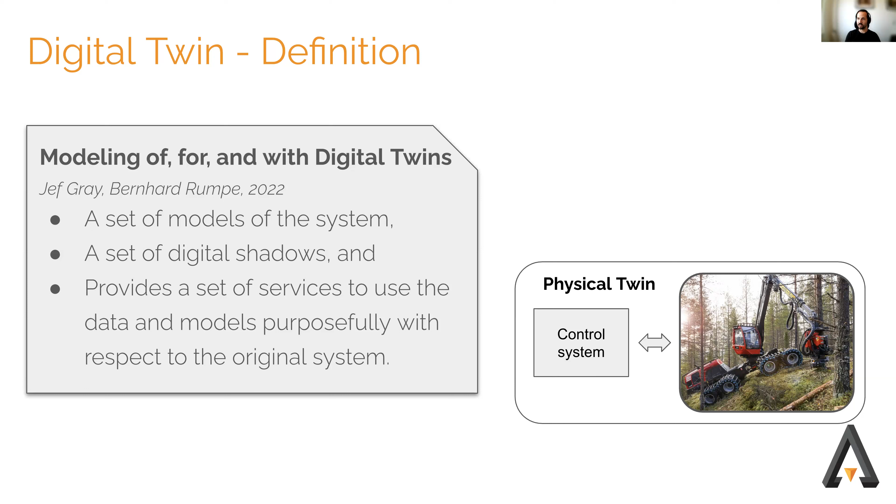And that's kind of the theoretical model, right? So the set of models of the system is the physical twin in the terminology that we like here. And the digital twin is the digital shadow then. Both these systems typically have hardware parts and software parts. These images show how the setup usually looks in our work. There is some kind of hardware, like a heavy machine, could be other things, but it's representative of what we work with. And the hardware has software, and both the physical and the digital twin have those systems, and then they interact.

There's data going from the physical twin, and there's control going back from the digital twin to the physical twin. This is also from theoretical stuff we've been looking at, and if we don't have all these four parts, the two twins and data and control, then it's kind of, well, parts of a digital twin. But this is generally one test we use to see, are we using this kind of workflow? It's a workflow we sell to our customers, so it's useful to have a definition.

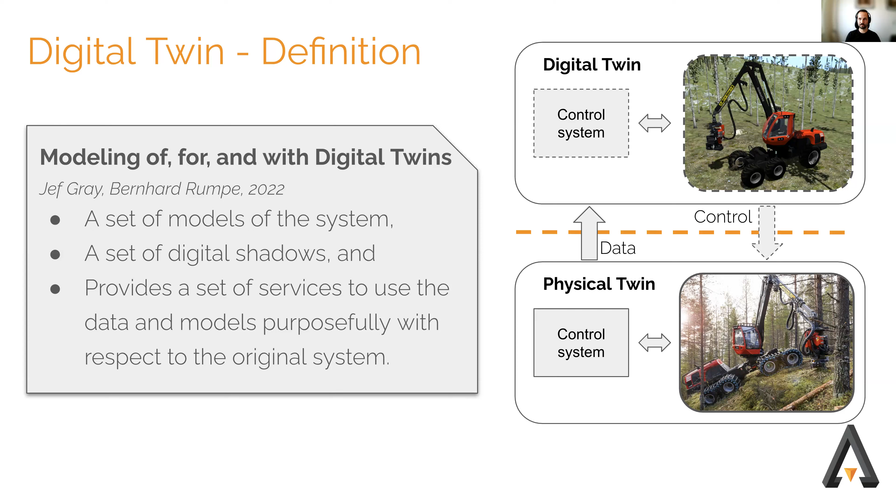And on the next slide, I'll just say some words on kinematics versus dynamics. Because it's, thank you, Fredrik. It's useful to look at just the right amount of stuff, right? Kinematics is a traditional way of controlling robots. You have angles and positions of the different parts of the robot. A really stiff system, typically. An industrial robot doing welding in a car factory perhaps is very stiff, and the path planning can be parameterized, since the position of the end effector can be known from angles and position. Scenarios are well defined. You can use inverse kinematics to know where the robot is going.

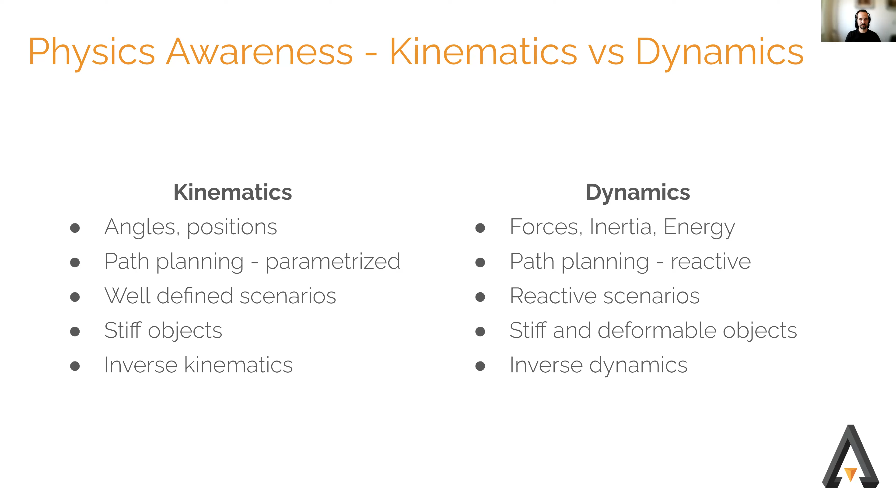And with dynamics, next click, Fredrik, we have the forces, the inertia, and the energy known apart from the angles and positions. The path planning can be reactive. For instance, if some heavy load is placed on the robot, you can calculate and work with the energy related to that. Reactive scenarios, reactive to collisions mainly, that's one of the big ones. We can also work with deformable objects and inverse dynamics, which is a topic I'd like to have said more about, but this isn't for this talk. So this is a distinction we often use.

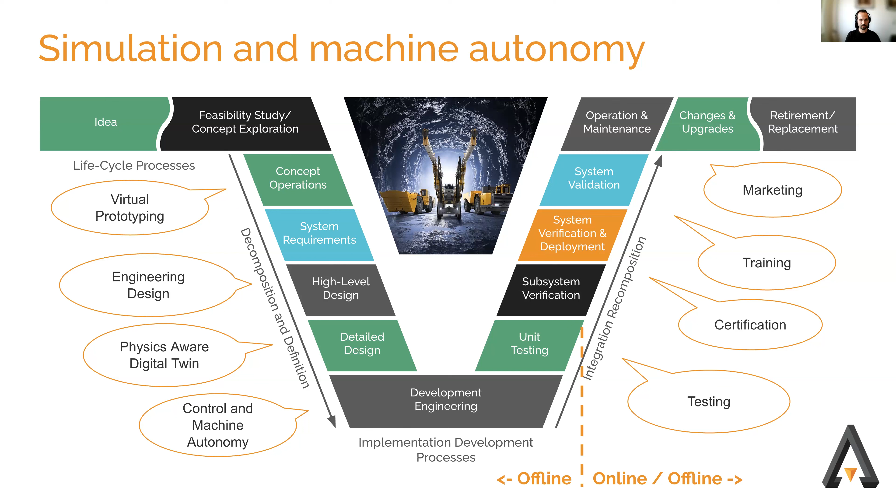And if you look at the next click, we can see we've made a small arrow there. Digital twins can be offline and online, right? There can be a simulation of the digital system that happens in discrete time, not real time. So you make a simulation at the concept level, and then you test things out, and then you go back and test on the physical, and you go back and forth between the digital. But it doesn't have to be in real time. But when you go to a digital twin modeling something that's happening right now, it's an online simulation. Yes, next slide.

Sensors and perception need to be simulated, dynamic scenarios, simulation services. Maybe you don't want to run everything on one computer. There needs to be expertise and feedback through control and ML training, test and certifications, monitoring and logging. These are all parts of digital twin as a solution. And once again, classically, simulations can be just a small part of this. So in order to tie everything together, we've been trying to define a modeling language that can follow the digital twin along between these, this is kind of opening up from just the machine simulation.

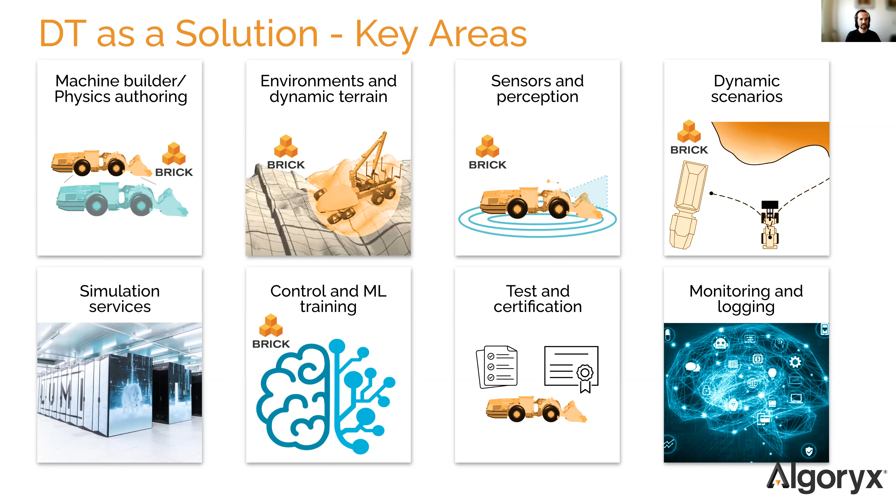Yes, so next slide. Okay, I'll take over then.

So I will start then by explaining our main product, which I have to mention requires a commercial license. So our main product is a physics engine. So we are really fast and stable and robust and accurate. And we are working in the non-smooth domain. So we handle impacts in real time, and we can handle dry friction as well.

And our product is based on the SPOOK method, which is presented in Ghosts and Machines, which is written by Claude Lacoursière, who is one of our founders. And just to mention, we can guarantee stability by setting a damping time, which will then make our equations to be satisfied, and we get good matrices to solve.

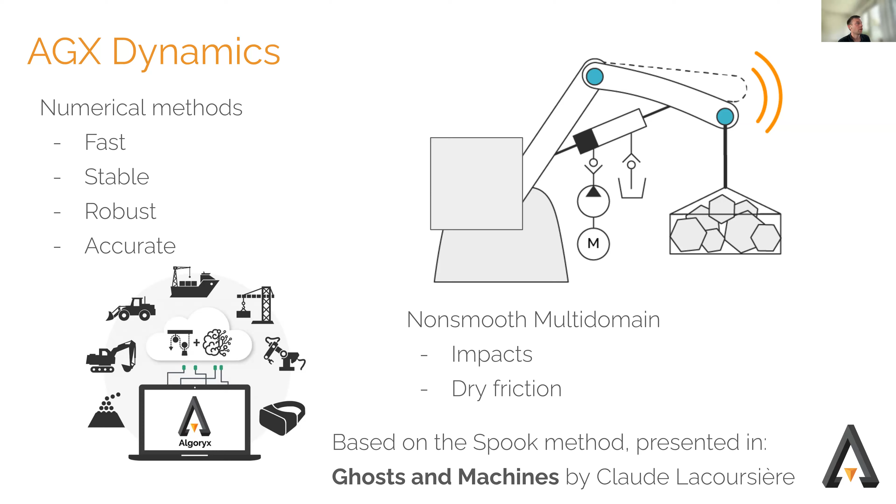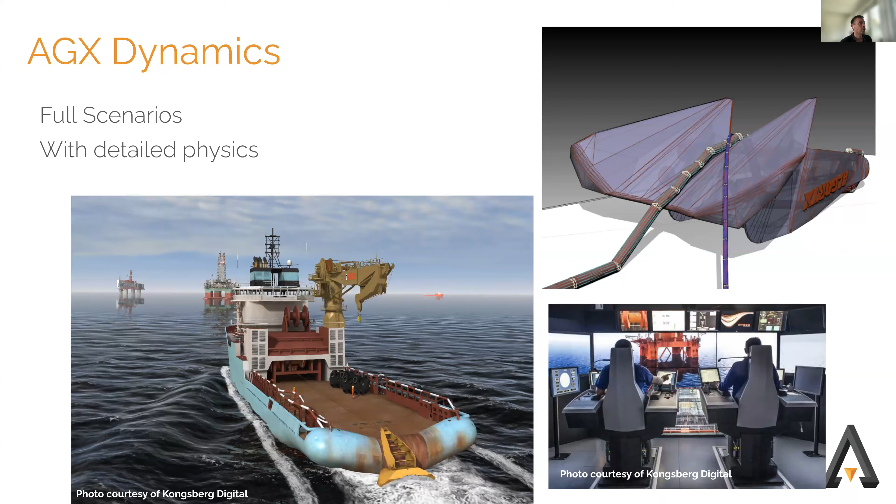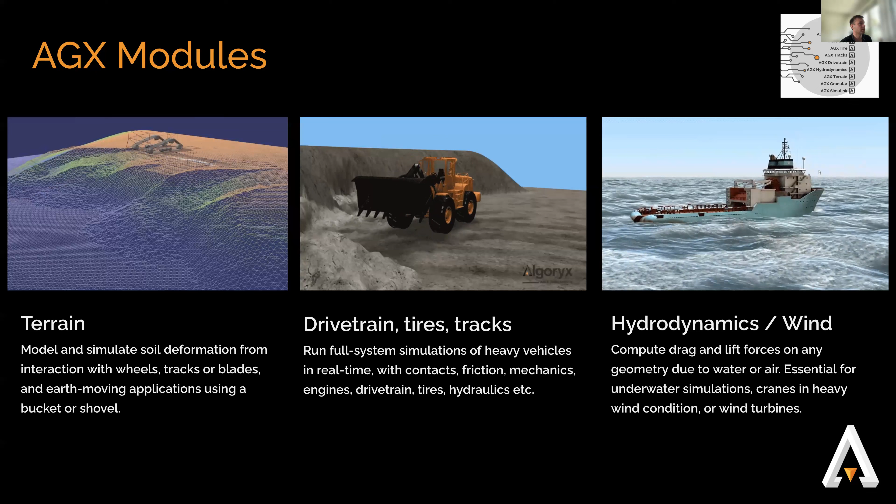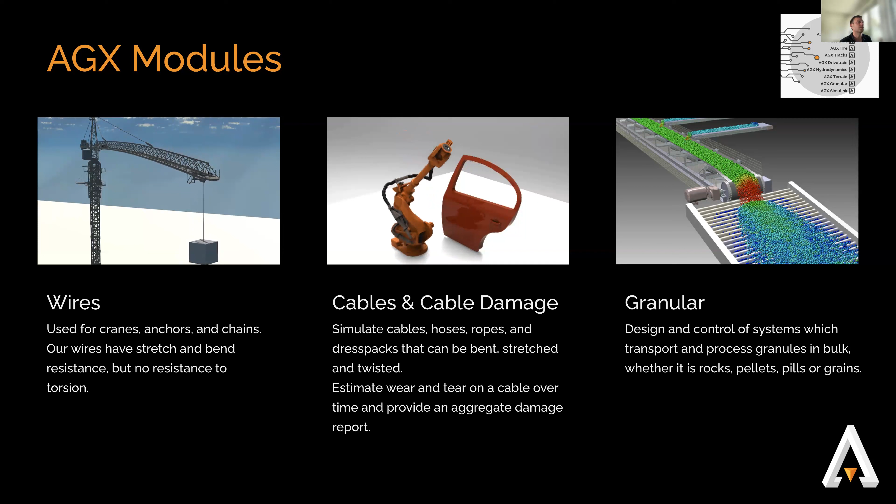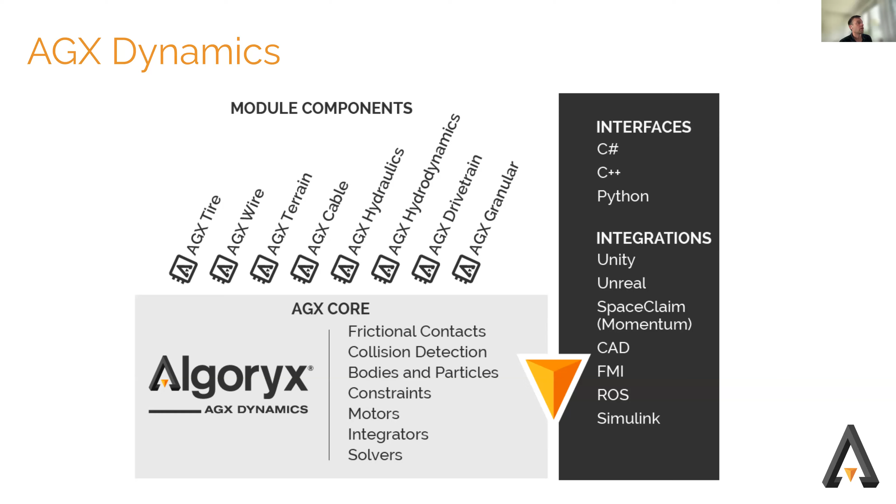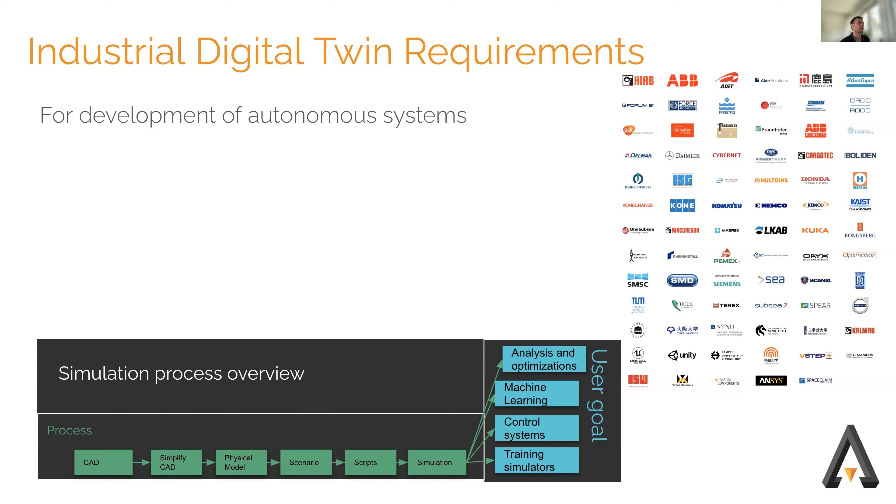And these modules are accessible today through coding interfaces, mainly used in C#, C++, and Python. We also have integrations in Unity and Unreal. However, to the right now, you see a list of our customers, and they integrate this into their system. They adopt our product and integrate it, and they have a lot of requirements that they usually have to do on their side. So usually they do something autonomous. They have a control system in the loop in their real product, and they want a digital twin that they either want to use for machine learning or developing their control systems or doing training simulators.

And so control system integration, they always need to do. They want real world equivalent performance. So for example, these wires need to have accurate tension measurements. They usually have CAD representations of their products. They want the CAD more or less automatically reflected into simulation, which is not usually a thing.

So the green squares in this figure show that they start from CAD, then they have to do this long process to simplify the CAD. They will need to add some physical properties to this model. They have to model a scenario somehow, maybe in code, maybe somewhere else. They need to add a lot of logic in scripts, and then they can put this into the simulation to do what they want.

They also want this in variable configuration. So the CAD might be in one configuration, but they want a different setting somewhere or a slightly different product to simulate. And then there's a lot of work to redo this from the beginning. So this is something we've been working on, how to make this more general.

So they also need a single source of truth for the simulation model, so that it's not like, oh, did you remember which file we did this part of the thing in, and then they email the simulation models to each other, which has happened, and that's something they want to avoid, but it happens. So we try to solve these problems for them.

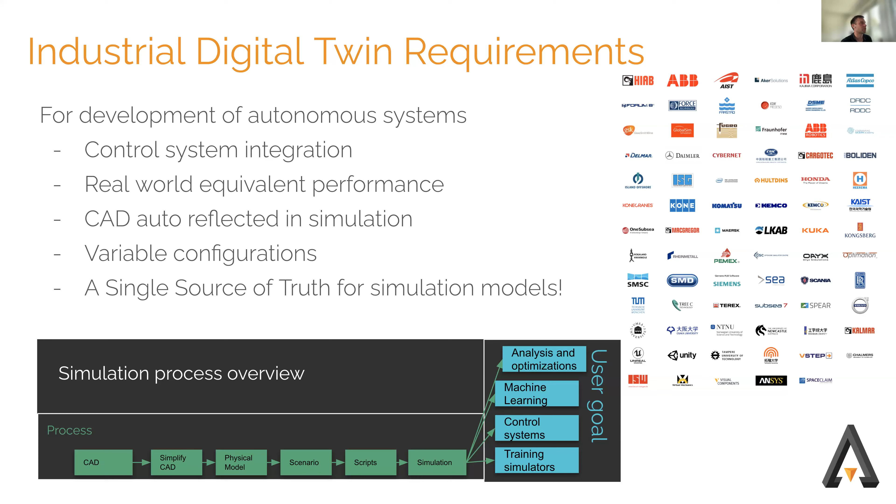So we need somewhere to define this physics-aware digital twin, but where should we define it? And some of our users make their own formats and so on. And we've seen this throughout the years, and we want to come with something that solves a lot of their problems. We have tried to use some XML-based formats, like URDF, the Unified Robot Description Format, but it's not enough to meet all simulation models. I mean, a wire is not described there. There are a lot of things that don't fit in these formats.

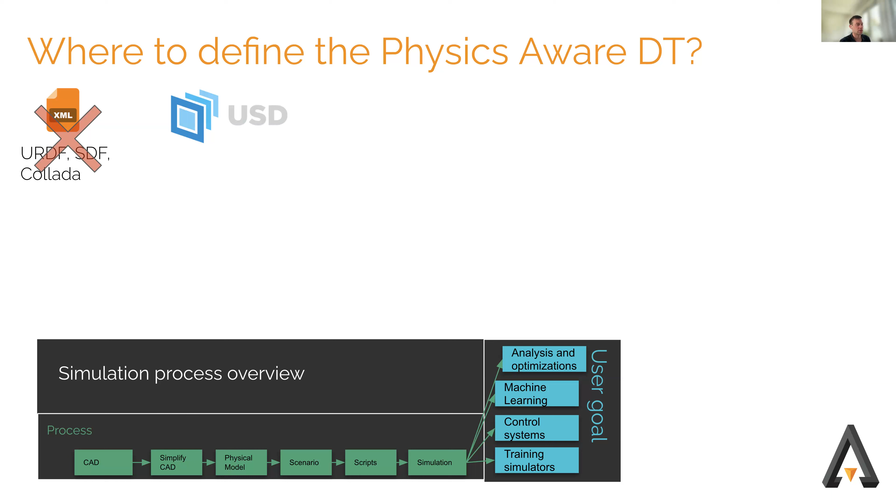Then we have been looking into the Universal Scene Description format developed by Pixar, which has bindings to C++ code, and it has a layer system where you can really have these definitions on top of definitions, but it's mainly used for graphics. The physics layer is not mature enough, and there's, according to me, one thing missing with expressions, where we need variables in these mathematical expressions to describe our models. So that wasn't good enough for us either.

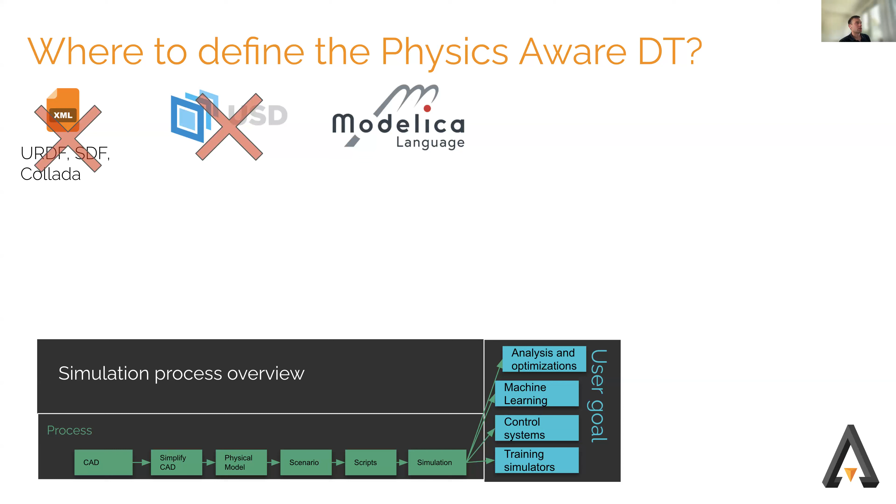But we looked into Modelica, and Modelica gives us these expressions, but we couldn't find a good fit for these real-time simulations with bindings to control systems and so on. So we had to develop something ourselves, and this has been ongoing for a couple of years.

So Brick is, to be clear, an open modeling language. Then we use Brick to define the Brick physics format. So Brick could be used for other things than physics, of course, but later on I will show you how we use Brick and describe the physics format and its features. And using this format, we can then bind it to our API in the physics, AGX Dynamics, and then we have the AGX Brick runtime.

So then I would say that Brick would address these parts of the customer simulation process, where they would maybe get values from CAD and describe the physical properties of the models and describe scenarios, and they could eliminate a lot of logic that could then be living in the digital twin representation in Brick. And then AGX Brick runtime would load this model, and they can immediately do their work.

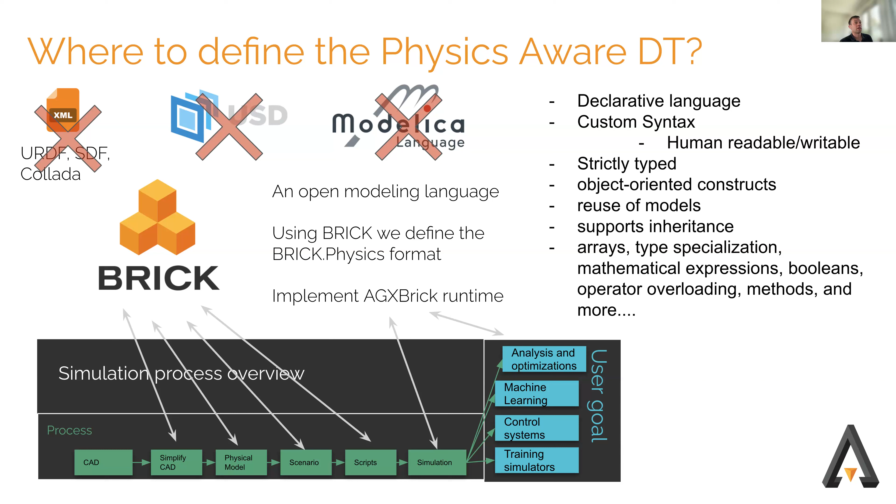So just quickly, Brick, I would say, is a declarative language. It has a custom syntax which is human readable and writable, strictly typed, it uses object-oriented constructs, and you can reuse models. It supports inheritance. You have type specialization and these mathematical expressions and much more. And we'll go through a couple of features here.

And then we want to be able to load this to the APIs of different tools. So it shouldn't be bound to our product, of course. So we could load it with Bullet or PhysX or some other physics engine. That's one of the main purposes.

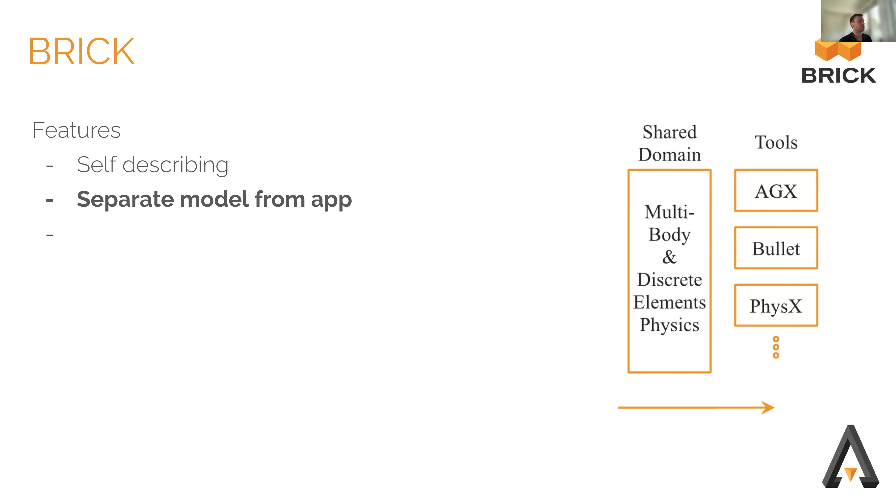But everybody does not want to model their product with multi-body, very general things. They want a domain-specific language. So Brick is built so that you can build domain-specific ontology and formats on top of other formats. So we would call it a bundle. So it could be a Brick robot bundle that depends on the multi-body bundle. And in this way, we can bridge domains. So we can have a robot-specific ontology and a vehicle-specific ontology.

And then with Brick, maybe we put a crane on a truck. And both are described with their specific domain-specific bundles, but then in the shared domain they can meet and then be executed in the tool. So there's one more level to this.

So there are a lot of external resources that we would say are a better fit for specific model descriptions. So URDF, there are a lot of robots defined in URDF. So we had to make a way for such formats to be referenced by Brick instead of you having to copy the data. And that's an important thing as well. I'll get back to that later.

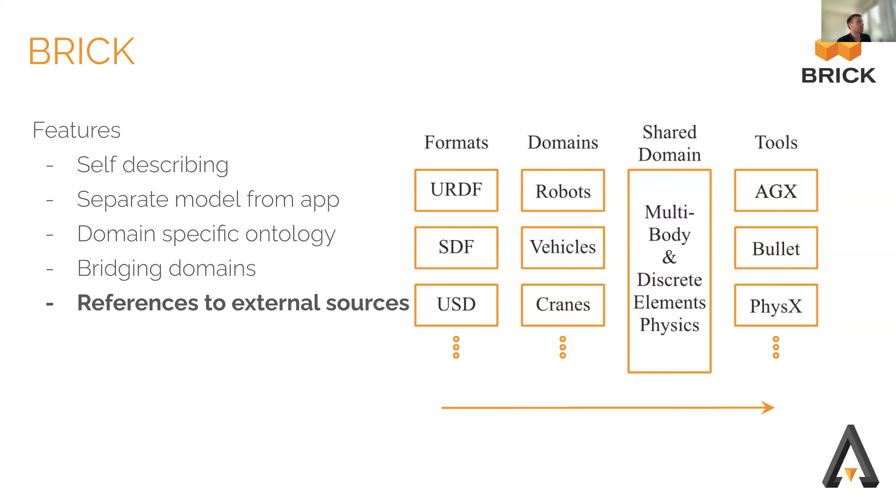So, yeah. Okay, I didn't see. All right.

So now I'm going to try to explain how you use Brick to model by composition and try to show how it's extendable and reusable by a simple example, as simple as I could make it. So these Brick bundles, say that I'm using the Physics3D Brick bundle, which has the representation of a rigid body. So it knows what the rigid body is in the multi-body domain.

Then I want to declare a wheel. And then I say that the wheel has a radius attribute and a width attribute. And the wheel should also have a collision geometry. And then I add the collision geometry attribute, which then gets a type of a cylinder, which the Physics3D bundle knows about. And then I map these values from the wheel radius into the collision geometry. And the cylinder already has the notion of the radius and height.

But then for the wheel, I call it width instead. I don't know if it makes sense. All right, so this is a wheel. And I can't instantiate this. It has two parameters that are not defined. But then I use Brick to say, now I want to define a simple wheel. And then I define these variables, and it's very compact and easy. And now this is instantiable.

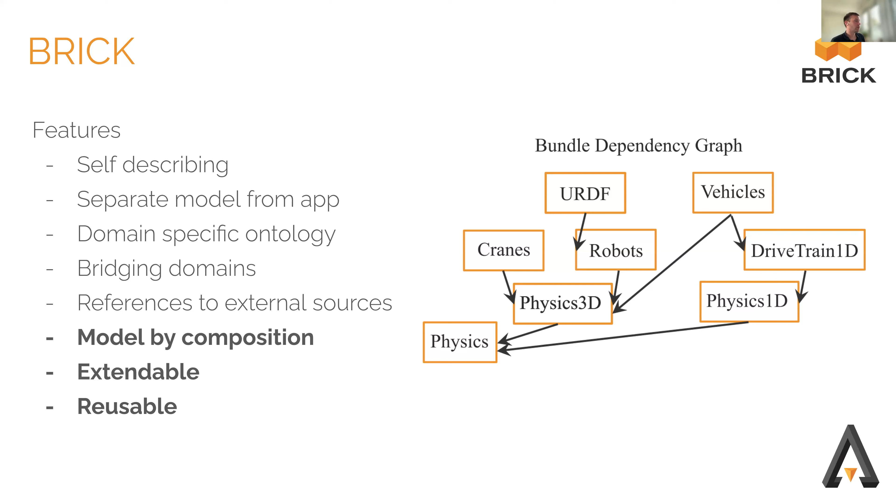We don't need 3D physics, but then we can have this dependency so that we utilize the ontology of both worlds, and we can model in the domain-specific with the domain-specific ontology, and we can give the user something that they recognize, but still everything propagates down to the multi-body shared domain, and then we can execute the simulation.

Quickly about the Brick infrastructure here. So we have C++ runtime bindings, I told you. And we have to go from text representation to a C++ runtime. And this is a quick view over the parser and how we do semantic analysis, and then how some bundles have C++ code that has to be executed on load, and some parts don't need that. You can build logic into your models. And this also enables the evaluation of expressions, so that a variable could depend on several variables, and then you have the mathematical evaluation of equations.

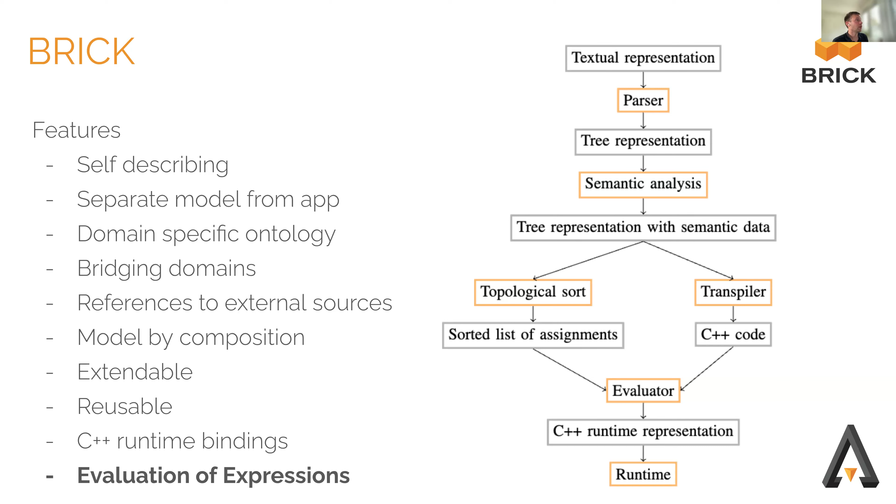All right. So this solution, Brick plus AGX, gives us a great feature list, in my opinion. And here's a video. It's an old video, but it shows you how the CAD has been imported, and then we can assemble this with the Brick definition. Imagine that every part is assembled by a constraint, and this constraint has variables, and these variables could have variable initial conditions. So you can configure this in any configuration that is available in reality. And then you can parallelize this and do simulations of your machine in various different initial configurations, for example.

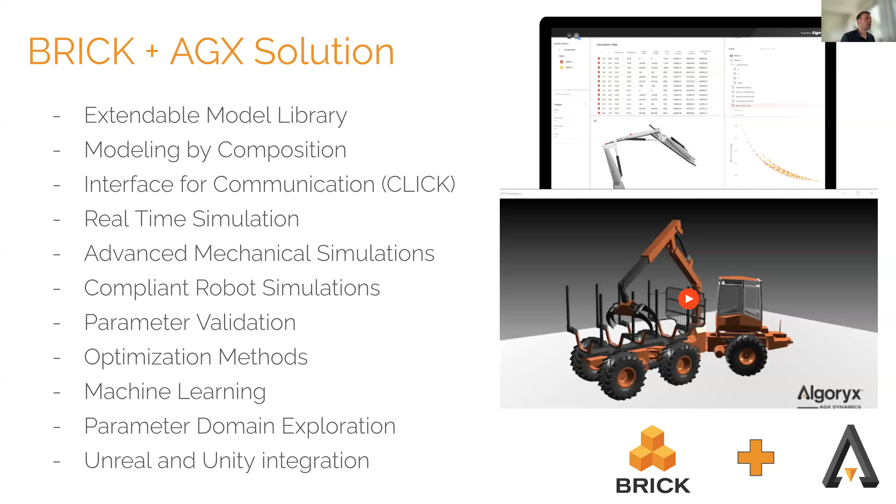And this is what we did in one project where we developed an online web application for engineering design of loader cranes, where we could, for example, change some values and then the crane just built itself and we could measure capacity of the crane with its full working region.

Other projects where we've been using Brick. Now this is actually the Brick language you just saw. That's something that's quite new. We were using YAML, just a subset of YAML, and it did make a lot of sense, but still there were some issues, and we decided to define this language ourselves. So the code you see now is the old Brick, and the new Brick would actually do the same thing in less than half the number of rows.

So that's good. And this is the AITOC project where we had a Delta robot which has loops in the system. And I just show you how I can take one value which then propagates through the system and then initializes the model in a different initial state.

And then you can simulate it as well. So there's some friction in this thing. So this, I think, visualizes pretty well how physics-aware a Brick twin can be, with the mechanics assembled and useful.

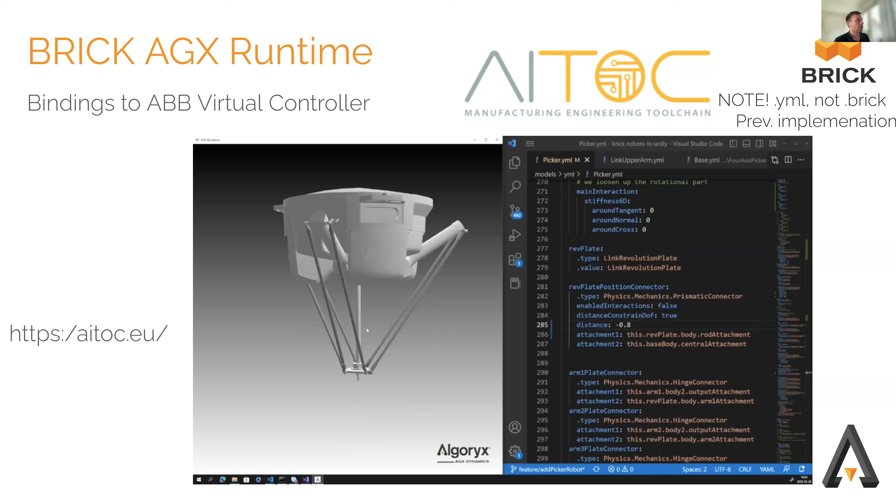Let's move on. You mentioned before that I was involved in the IAM project, and here we are also using the Brick AGX runtime. In this project, we are trying to make robots toss, grab, and box objects, and then we need this in simulation. So here we have the Panda robot, which is a URDF file, which we take into Brick,

and then we augment this. So the suction cup here on the suction gripper is not deformable, it's just a part of the URDF file, but then we can augment this and make it flexible. And then we add a vacuum system, and then we can have this simulation experience.

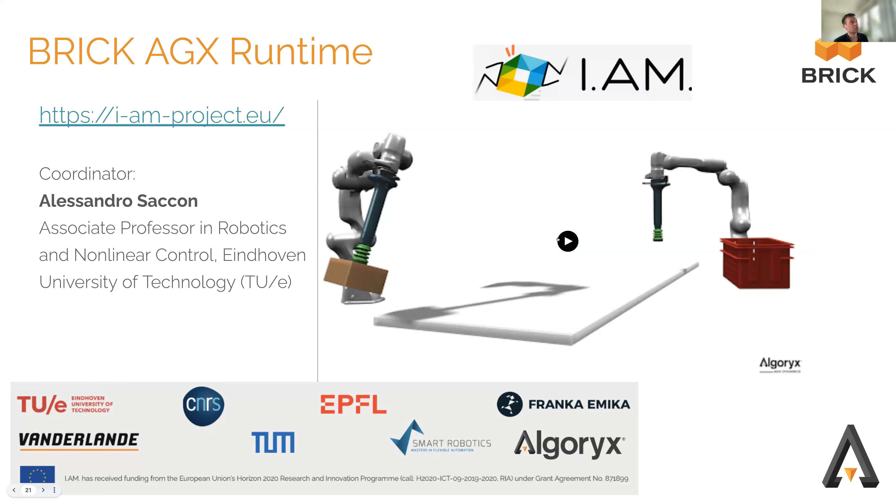And there are a lot of PhDs and postdocs and master's thesis students that work with this framework we're developing in IAM, which is using Brick, and it's also using something we call Click, which is an integration with control systems. And this is just one other work, a thesis project by Stefan van der Palen, who's in Eindhoven, and he's doing two things with his digital twin, I would say.

He's doing verification of sensor signals with physics. So he has a visual sensor that does 3D estimation of where the boxes are. But then to verify this, he could initialize these sensor representations in simulation, and then he can verify in that simulation if it's accurate or not. And maybe the boxes will fall and he will require a new sensor

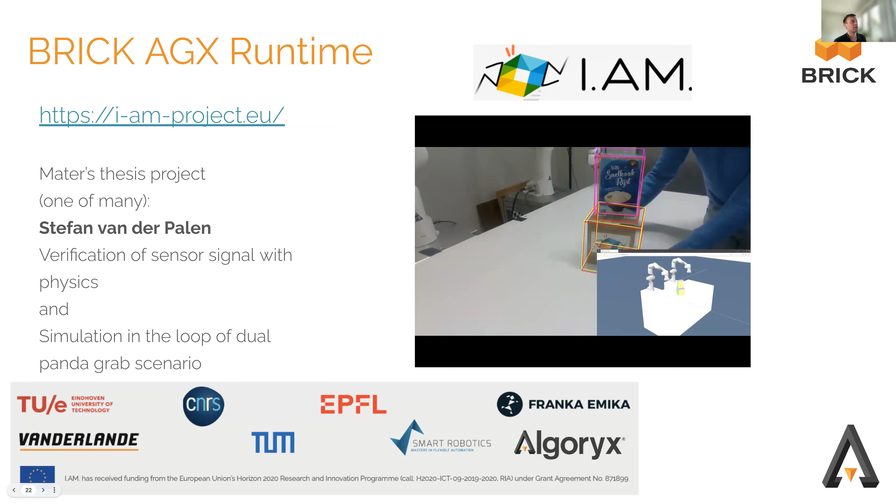request. And also he can use the simulation in the control system and test before the control system is acting on the real system. So that's a work in progress, and that's one of many projects, but I will not go through them all.

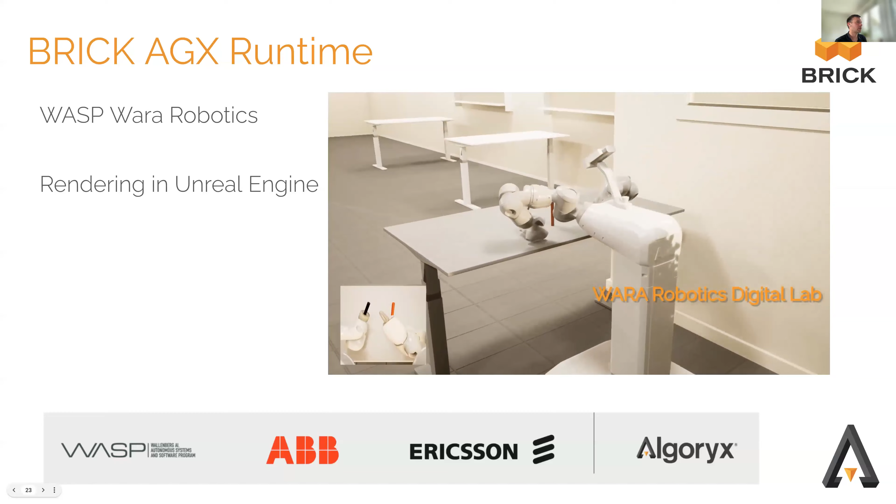Another place where we are using the Brick runtime is together with Unreal Engine, where we integrate the Brick AGX runtime and visualize it in Unreal Engine. So then we have this result, and this is more or less the same thing, but we have nicer graphics.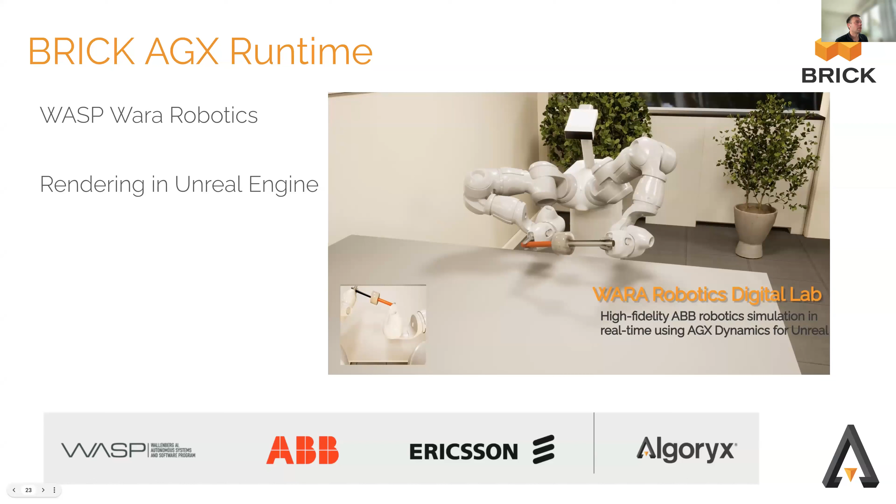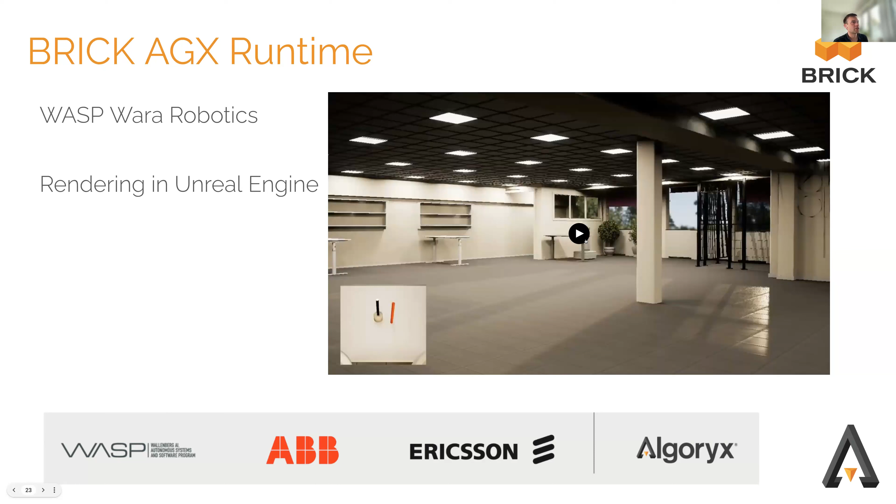All right, so now I think I have shown you a lot of things that we can do, and how we have imagined that all our users in the future, and hopefully even more widely than just our users, can represent physics models with Brick. All right, so let's move on. Now I move back to Joakim.

Thank you, Fredrik. Thank you for that very in-depth walkthrough of what lies behind our physics and how we define it technically. I've been working on more practical stuff, using those systems, using AGX Dynamics, and using Brick in order to do research and client projects.

I've ended up doing mining industry things. Epiroc is one of our larger customers. And here I'm going to present a case study about digital twin simulation. This project is called Safe Remote Drilling Through Predictive Modeling of Hydraulic Hoses. We usually go with Hose Protect because it's about protecting the hoses on a drill rig, such as the one

on the left. On the right, you can see a boom simulated with some of the hydraulic hoses normally present on the telescopic actuated booms on the Boomer drill rig. The Epiroc Boomer is a complex machine interacting with itself and the environment. The question in this project is, how does the control system predict collisions with deformable hoses? Or rather, how should it detect and predict them?

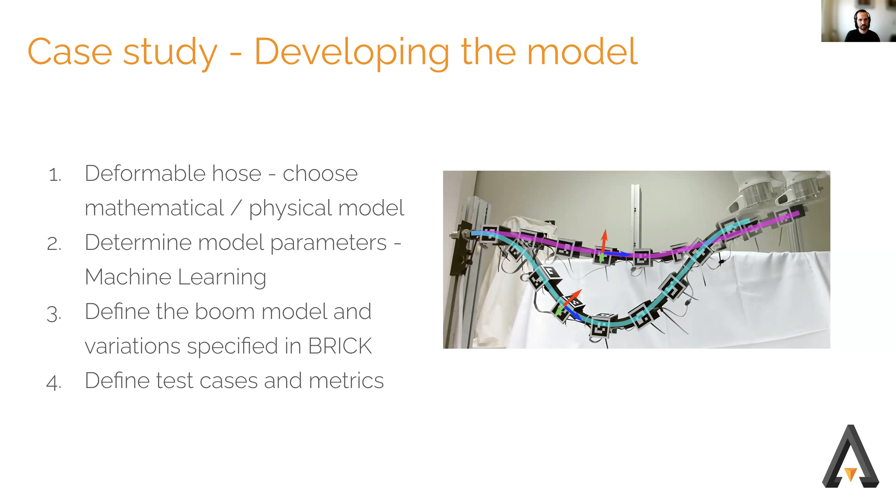Finally, to complete the project, test cases and metrics have to be defined in order to see if the predictive model would be of use. Next slide.

Existing model is really not predicting hoses at all. Collision model for moving booms around in autonomous mode, or rather automatic mode, would be to have parametric boxes, forbidden zones, projected overlap. This ignores hoses, of course, limited number of boxes and output data. Still is a good model. The boomer machine can do automatic functions to a large degree.

Here I'd like to just add some distinction between automatic and autonomous, at least in our usage of those words. There is a large difference between those two terms, in that in the automatic mode there's very limited decision capabilities, while an autonomous system is able to make some kind of decisions based on complex data instead of just following a path and the like. So we go instead to the new models and predictors that have been evaluated in this project.

The machine learning model trained on the dynamics data from the simulation is one of the new model predictors that can be used for collisions and damage prediction on the hoses. And that is kind of the more established way of using this type of predictor, because an ML model can be differentiable, and the predictions will be faster with the differentiable model generally.

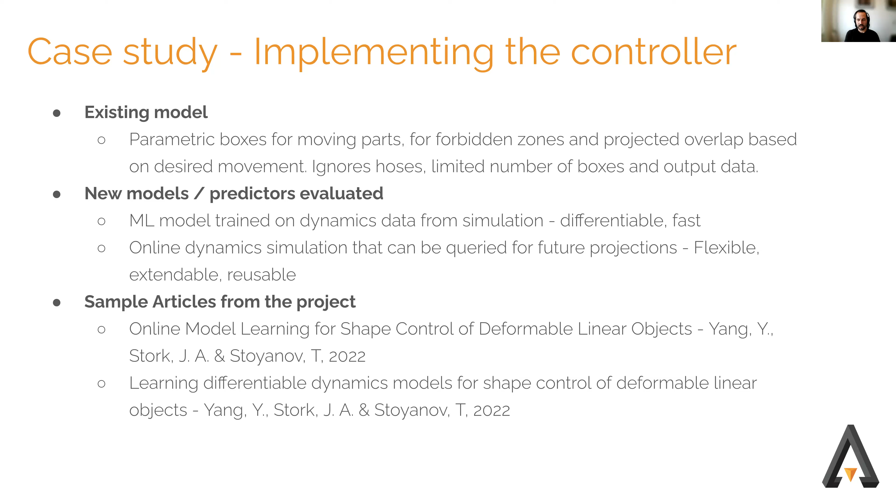Next, there is a small thing with sample articles from the project, mainly on the machine learning model. This project isn't complete. It's been overfunded, if I didn't mention that in the previous slide. There will be more articles published by Yuxuan Yang, the PhD student, and Johannes Stork and Todor Stoyanov. I think at least one more coming up.

Finally, some quick demo of some tests we did. These are just some quick tests of moving the boom around, looking at deformations, and if you can see it, there's a purple outline of a box following the hoses around. That's one quick and easy way to see where not to move the boom, if one would want to move the boom where the hoses don't collide with the floor, cliffs, other booms, and the like.

Right, I listed some summary there of the offline simulation that can be used. This is modeled. We've been using the integration with Unity, the AGX for Unity package. Using that, there can be virtual prototyping for placement of the hoses, like a static enhancement of the hose thing. But it can also be an online thing that's used in the control system in order to make projections of what's happening, which is what we call physics aware. The control system would, if using that method, be very much aware of the physics of itself.

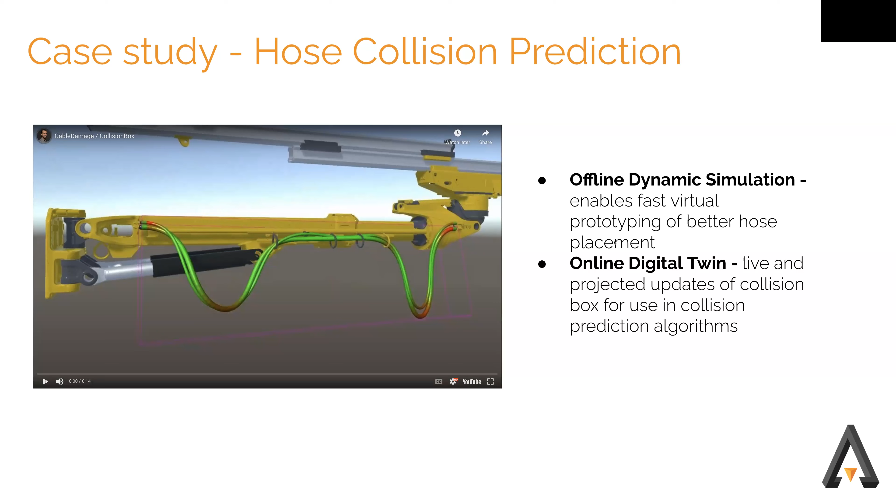I was thinking, if I may ask a question, about the distinction between the offline and the online